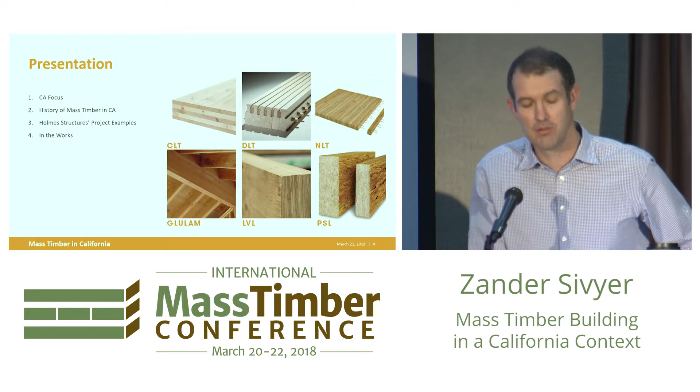Okay, so what I'm going to talk about today, as I mentioned, is a California focus, a little bit of history on buildings that have been built in California and some of the code evolution, and then spend a little bit of time on 3 projects that Holmes Structures has been working on in California, and then look at what's next. No one needs much introduction into what mass timber is in general. My presentation focuses more on the CLT, NLT, DLT flooring systems and potentially shear systems in buildings than what has been really the more traditional kind of glulam, LVL type products. So we'll kind of run through all of those.

It's baby steps in California. I kind of tried to do as much research as I could in terms of mass timber buildings that have been built. I got to a grand total of 8 in California, and 4 of those were completed last year. There's one building in California that we'll talk about that's all mass timber CLT building. That's the Plumas County Biomass building. Actually, the client for that at the Sierra Institute is here, so thank you very much for being the first.

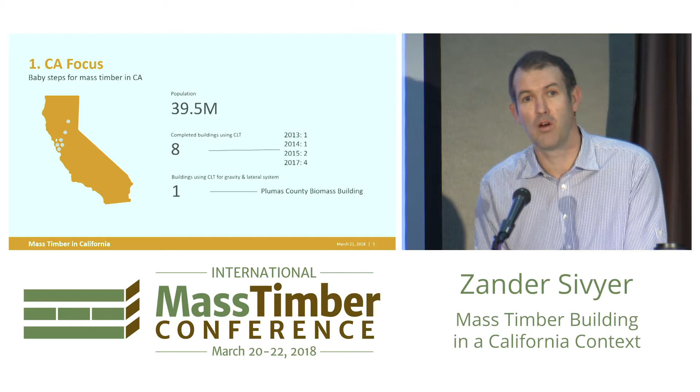But there's a hell of an opportunity there. I think where the sweet spot is for mass timber, it really falls in line with a lot of the buildings that are being built in California and a lot of the buildings that need to be built both at a commercial scale and also a multifamily residential scale. So I would expect these numbers to change rapidly, but it is interesting to see just how long it's taken to gain any traction and actually to get projects built.

So part of the history, I think if you looked at mass timber buildings in California, this is a picture of Cooley Landing, which is not one of our projects, but designed by KPFF up here in Portland. It was about the only example you could find of a mass timber building in California for a number of years. And up until really the code change that occurred January 1st of this year in the California Building Code, CLT was not in the California Building Code. I think part of the earlier talk this morning mentioned an adoption into the code in 2015. It still took until January 1st of 2018 for that to make its way into the CBC.

Before that time, anything using CLT needed an alternate means and methods request and running through the permitting agency. After January 1st of this year, we now have CLT in the CBC, only for gravity load applications in its entirety. Anything that uses mass timber or CLT as part of the lateral load resisting system, the floors, walls, diaphragms, still needs an alternate means and methods request.

So there's still some challenges there, and it requires kind of a lot of incremental advances, especially with building officials, none of whom want to be the first to approve anything new and different in California.

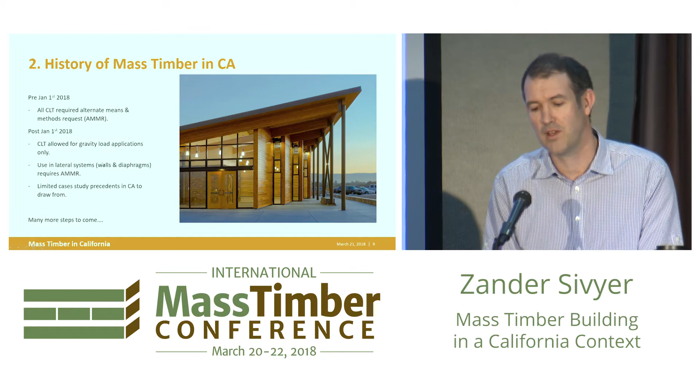So I think part of the difficulty we've had with some of the projects that we've pushed through have been to point to other project precedents and where it has been approved elsewhere in California. So part of the thrust of this is maybe to illustrate some of those projects that have been approved, and hopefully collectively we can kind of push the needle forward.

One example is a project that recently topped out. It's in Brentwood, California, which is in the East Bay of the San Francisco Bay Area. It's a public library, a little over 20,000 square foot building, two-story building, CLT floors and roof, and that's actually composite CLT with a concrete topping slab on top of a structural steel frame that's both the gravity and the lateral system. So it's a structural steel moment frame system.

Type 5 construction, so easily permittable through the code. It was, however, the first building in California that used CLT compositely with concrete, so that took just a little bit of getting through the local authority, but they were okay with the first principles justification for the use of CLT compositely with a concrete topping slab.

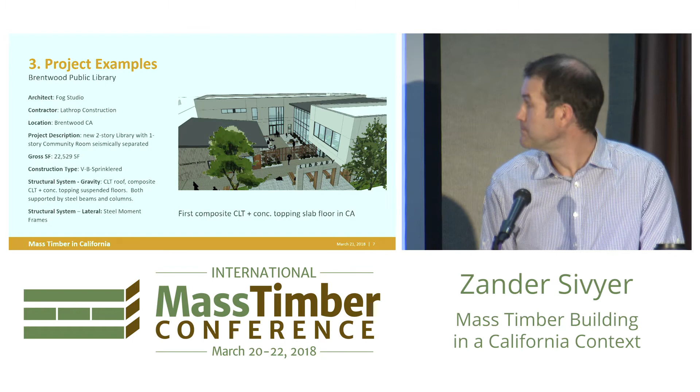There's some photos of the CLT panels going in. It was a really great example of kind of speed of erection. I think the steel frame and the CLT went in a period of weeks. It was really exceptionally done. I think the CLT for this project was supplied by Structurlam, who did a great job kind of working with us on all of the structural detailing going in.

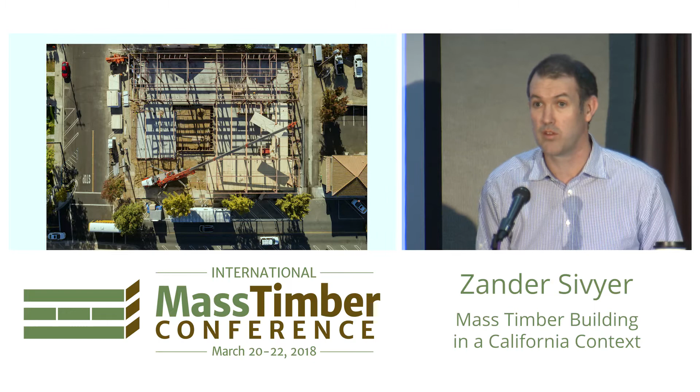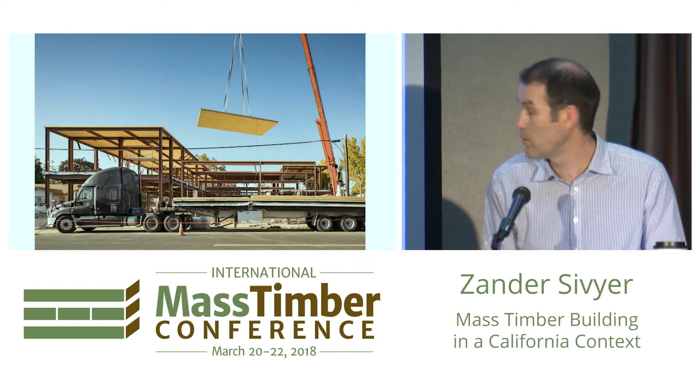So the panels, I guess the hardest part with taking photos of these is that the trucks started turning up at 6 or 7 o'clock, and if you weren't there by 9 o'clock, the trucks were empty, all the panels were installed, and people were waiting for the next shipment the next day. So it was really quick going. And this is the kind of CLT in all its glory. On the underside, the soffit of these areas will be exposed in the final condition of the library.

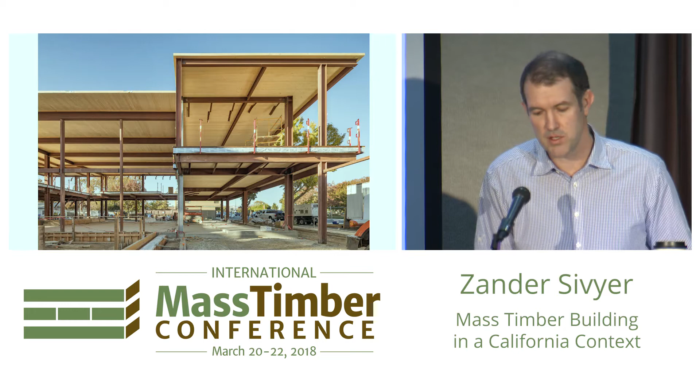The next project that I'll mention is the Plumas Health and Human Services Biomass Boiler Building. It's a grand total of 2,400 square feet, and maybe I'm rounding up to get to that number. But it is a one-story building in Quincy, which is a little, I think, east of Chico. It's entirely CLT structure, CLT walls, CLT roof slab.

It took a while to convince building officials that this was okay, and I think we actually drew a lot on the statewide ordinance in Oregon that has a published R value of a whopping total of 2 for CLT systems, and so that was able to be deemed code equivalent for the permitting agency. So that did give us some traction, but I am looking forward to some of the evolution in those R values and seismic values.

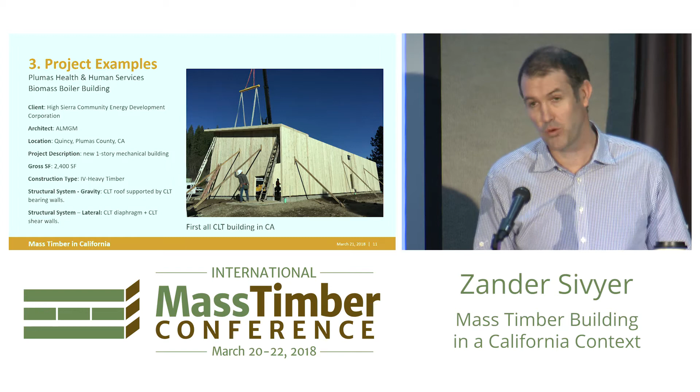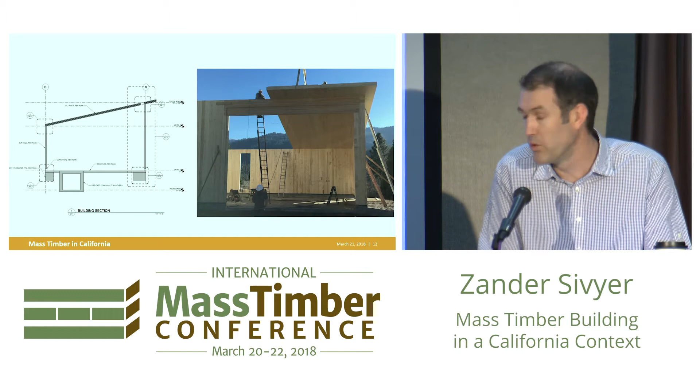It works well when you're one story and 2,400 square feet, but I might stretch to go any further. It was about as simple a CLT building as you could get and came together really well. Just a single span 3-ply CLT roof on top of CLT walls and a concrete foundation. And that's it. I think it's completed, topped out, and should be open shortly, if not already. A couple of weeks. Cool.

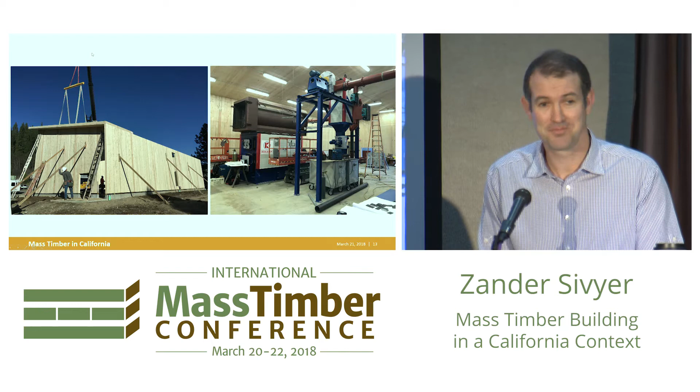The last project I might spend just a little bit more time on. It had some more challenge and certainly is the biggest of the 3 projects. This is a corporate campus in Mountain View, California, so kind of in the heart of Silicon Valley. It is a large endeavor. It's about 650,000 square feet of office, and there's about another 500,000 square feet of structured parking.

That office is a combination of new structure. There's shade under 500,000 square feet of new build mass timber building there, integrated with some existing repurposed office buildings. As you can tell from the rendering on the side, the entire roof of the new office building structure is going to be a green roof and accessible to all the employees.

And so there's some pretty hefty structural loads up there. It's at least 200 pounds a square foot in dead load, and then 100 pounds a square foot in live load because it's all accessible. I think there's even some areas where that loading goes up. The landscape architect had a grand vision of having an orchard on the roof, so there are some significant fruit trees in the middle around the cafe.

And like any good tech campus in the Bay Area, it also has an Olympic-sized soccer field and a couple of basketball courts and any of the recreation and amenities that you could ever wish for, so people never have to leave, I think.

This construction type was a Type 3B. It took a little bit of gymnastics from the architect to get that through the City of Mountain View, but it did get approved as an alternate means and methods request. That really gave us a lot of freedom on the structural side.

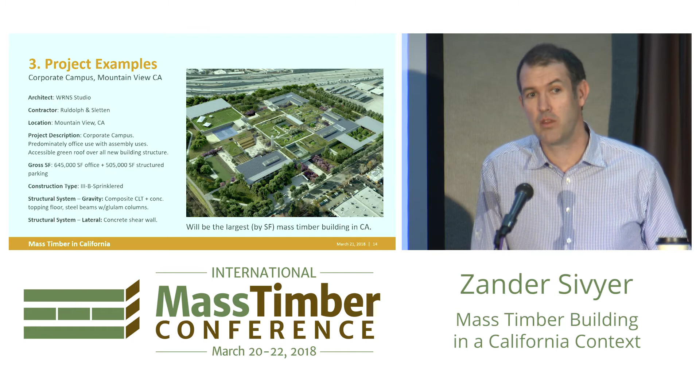So I wanted to just spend a little bit of time talking about some of the challenges and how we navigated those through the code. Before I do, I just have a couple of pictures of what some of the interior of that space will look like. The design brief from the client was for the large size and scale of this project. They really wanted to create a more human scale feel for the occupants in that building rather than a kind of generic tall steel and glass corporate building.

So hence the drive for natural light and exposed structure and the use of wood as a key part of that. They also have some pretty lofty sustainability goals. They were looking at a net zero building. They wanted a net zero water usage, so that green roof collects all the water for the campus and recycles it with holding tanks on site and through the campus, so it should be net zero energy and net zero water usage, which is a big deal in California after a number of years of drought.

And the wood material obviously was a big part of the sustainability story for the client, being the embodied carbon really made a significant difference. There's some open malls, and I'll talk a little bit about that as to how the Type 3B system worked through. And then all of the office space has both access to natural light and exposed wood in the glulam columns and also the soffit of the CLT floor slabs with limited coverings up above.

All right, so some of the challenges. This is a floor plate, and some of the cuts you see through the middle of the building really created separate diaphragms which allowed the building to be treated as a Type 3B building, and it was really defined as a mall concept, similar to a shopping mall with areas of enclosed space and then areas of open space. That took a little bit to get through, but really enabled a lot of flexibility with the materials. We then stuck with a code-compliant lateral system and that hybrid flooring system, which was able to be justified again through first principles.

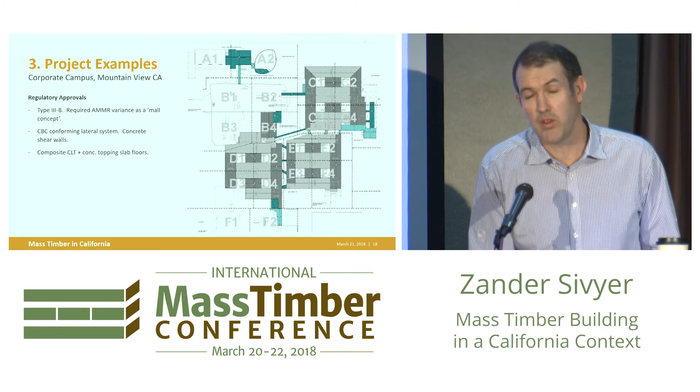A big challenge on a project of this scale for us and the whole design construction team was looking at procurement. There's just a large volume of wood on this project. Some of the stats from our friends at Structurlam, who ended up being selected to provide the wood on this: there's 160,000 cubic feet of CLT panel, 21,000 cubic feet of glulam columns, and a really tight time frame to turn that around. We have 6 months of pre-construction that we're mostly finished with, about 5 months of production, which is about to start, hopefully within the next month or so, and then optimistically a 3-month install.

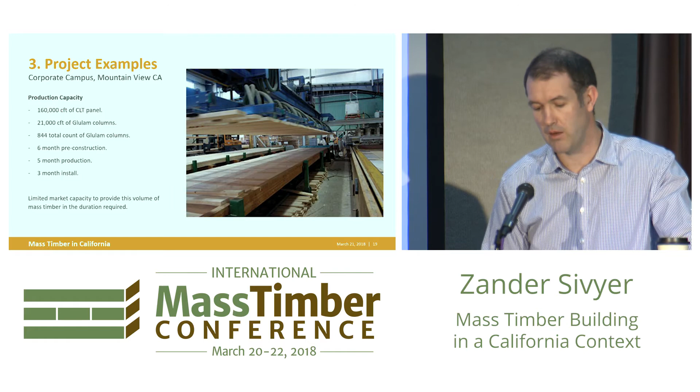So thinking about that with the construction team was really a big part of the procurement process, because in looking at that volume of wood for all of the potential new supply that's coming online and will come online, there's a lot of suppliers that can't produce that volume of panel in the time frame that was needed.

The general contractor at the time reached out to a firm up in Vancouver, Aspect, who helped with their procurement process. And this was actually really valuable in terms of just identifying the production capacity of a lot of the suppliers in the Northwest. And also it opened it up to some of the European suppliers of wood panel who produce much greater volumes of wood. So there was a really thoughtful and deliberative process that went through this procurement to make sure that we selected the right partner. And as I mentioned, that was Structurlam.

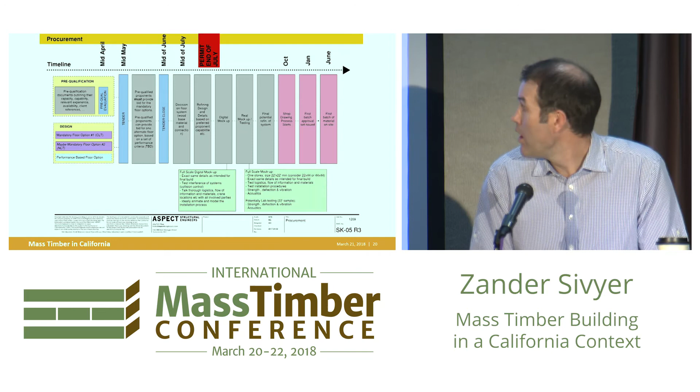Yeah, it was a hugely valuable experience. Maybe some of the other challenges, as we worked through it, I would say that for all the thought that went into that procurement process, the wood supplier was kind of the last key player on board in the team, and they got selected right about when we were done with the permit set of drawings.

So there's a lot of detailing done, and I would say that looking back, it would have been great to have had their input earlier, and that would have saved a lot of kind of redoing of things to help speed the production process after the construction drawings were done.

As we went through the design and pre-design process, we had a contractor on board, but as I mentioned, just the state of the industry in California, there's not been a lot of buildings built with mass timber. And so there was really not the depth of construction knowledge that you might hope for, and I hope that will change.

A lot of buildings of this scale in that part of the world get built as structural steel buildings. And so there was a big push to kind of think about, it's like, yeah, we want to do it in wood, but how do we make sure that we can build it like we do a steel building? And so there was a little bit of gymnastics around getting the detailing right. We iterated a lot, and we're really happy with where we ended up.

As structural engineers, we don't often get to drive aspects of the design, but we kind of took this one on board and we actually used SolidWorks to render out all of the different connection details that we could come up with, and then iterate with the contractor and also the wood supplier once they were on board.

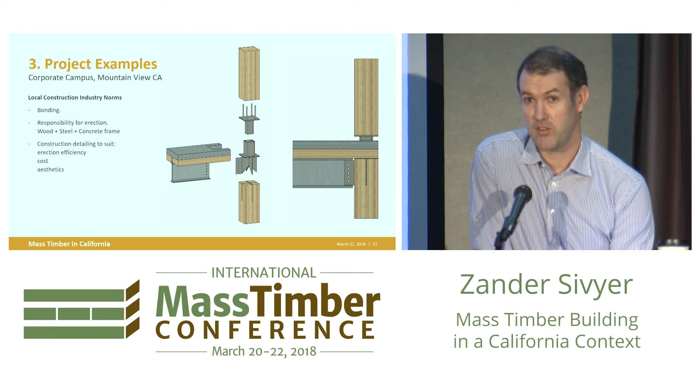All right, so what's coming up, or what are we looking at? I guess personally, I'm most excited to see some of the talks at this conference about some of the testing and development that's going on with regards to R factors and ductility factors for the use of CLT as lateral systems, some information that we as design professionals can draw from in the design of new structural systems.

There was a great end of the presentation this morning talking about some of the changes to the building code with regards to the types of construction available to us; that Type IV A, B, and C is really exciting to see progress. And as I mentioned, my colleague Bevan Jones at Holmes Fire has been really intimately involved in that, and I think it's going to open up a lot of opportunity for taller buildings and also more easily approvable buildings, certainly throughout California, but all over the country.

I think there's a lot of work that's going into looking at mass timber and prefabrication, whether that's prefabricated buildings or components of buildings. Certainly the folks at Katerra were talking about that this morning. We're also working with a different group of folks in the Silicon Valley who are looking at R&D efforts on prefabricated mass timber components and building components, and how to find out where the sweet spot is relative to traditional forms of construction, where it makes economic sense.

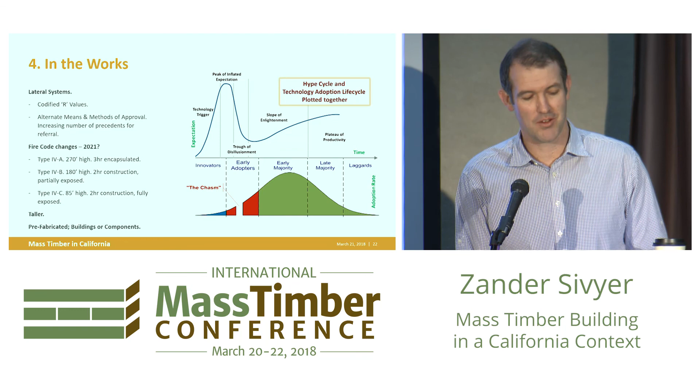I think every project and every individual is probably at a different stage of the adoption curve, but hopefully most people here are past that trough of disillusionment and on to the slope of enlightenment, because it'll be fun to see what happens next. Thank you.